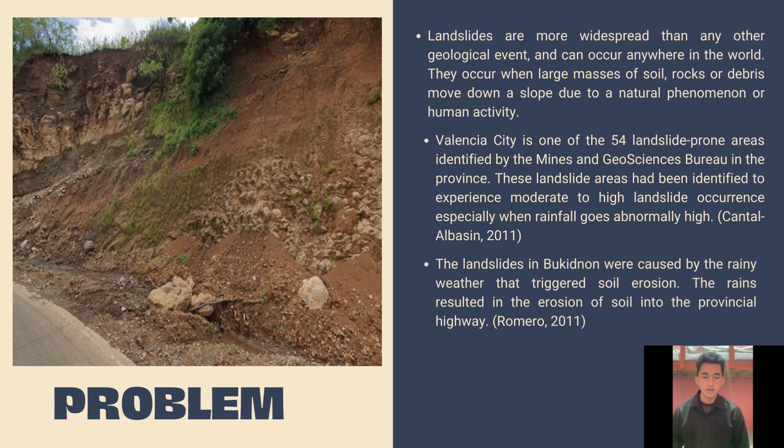The landslides in Bukidnon were caused by the rainy weather that triggered the soil erosion. The rains resulted in the erosion of soil into the provincial highway.

Introduction. Landslides pose a growing concern in the Philippines due to its mountainous terrain, seismic activity, and heavy rainfall. The country faces significant landslide risk with approximately 80% of its land area susceptible to landslides, ranking it fourth globally in terms of vulnerability. To address this issue, the integration of segmental retaining walls with geogrids has emerged as a promising approach, enhancing soil stability and strength while mitigating soil movement and structural failure.

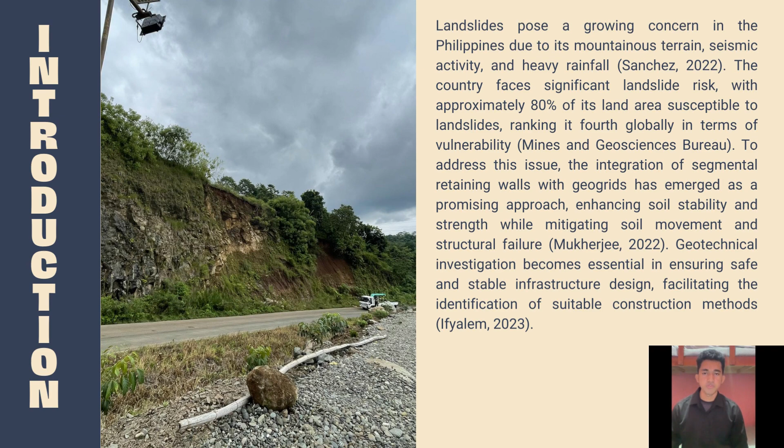Geotechnical investigation becomes essential in ensuring safe and stable infrastructure design, facilitating the identification of suitable construction methods. Integrating segmental retaining walls with geogrids and a road drainage system offers multiple benefits, including improved soil stabilization, efficient water management, and cost-effective solutions. This study aims to explore the geotechnical engineering approach for enhancing soil stabilization and water management in sustainable infrastructure along Poblacion Valencia City Diversion Road.

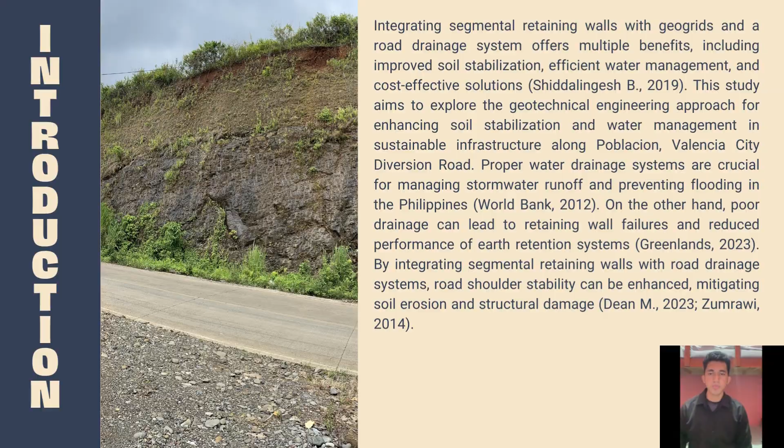Proper water drainage systems are crucial for managing stormwater runoff and preventing flooding in the Philippines. On the other hand, poor drainage can lead to retaining wall failures and reduced performance of earth retention systems. By integrating segmental retaining walls with road drainage systems, road shoulder stability can be enhanced, mitigating soil erosion and structural damage. So for our main title, we had Enhancing Soil Stabilization and Water Management, Integrating Segmental Retaining Walls with Geogrids and Road Drainage System at Poblacion Valencia City Diversion Road.

For the objectives, for the design of segmental retaining walls, we have to assess the stability of slope areas, optimize the design parameters of retaining walls for slope and unstable areas in connection with the application of geogrids. And also for the geotechnical investigation for integrating geogrids, we have to examine and determine geotechnical properties of soil. Also, we have to determine the effective locations and patterns for integrating and applying the geogrids, and also assess their effectiveness for our segmental retaining wall design.

And so for the design of road shoulder, for the integration of segmental retaining walls, we have to evaluate the significance of road shoulders for the safety of the road travelers in Valencia City Diversion Road near D'Bario Valencia. Also, we have to examine the required road shoulder width in the design of segmental retaining walls and drainage system for safety.

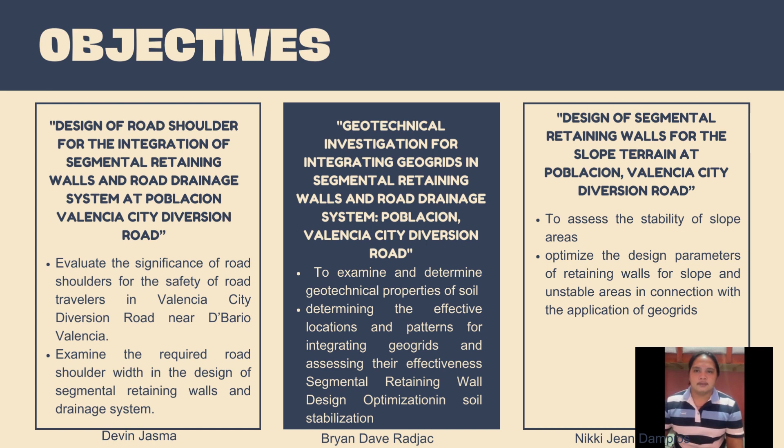And also for the design of drain pipe to be used at a retaining wall, we have to comprehend the influence of inadequate drainage on the integrity of retaining walls, potentially leading to failures or compromised serviceability over time. Offer appropriate solutions to enhance the drainage system and prevent potential risk associated with poor drainage in earth retaining structures. Also, we have to examine the drainage design's performance and recommend improvements to ensure optimal water management.

And so the development of water drainage system aims to improve drainage system efficiency and prevent flooding by analyzing existing systems, identifying weaknesses, and proposing enhancements. And also, we seek to enhance groundwater recharge by developing methods to capture and infiltrate rainwater into the subsurface through structures like infiltration basins and permeable pavements, promoting controlled replenishment of groundwater.

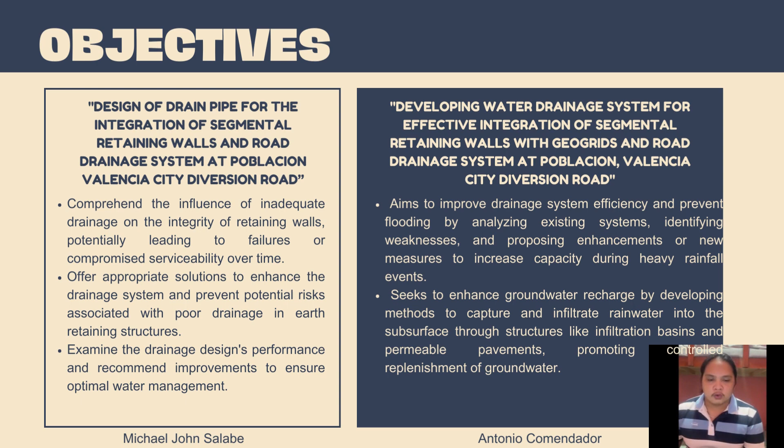So the significance of our study: it is significant to the community since it enhances the efficiency of transportation networks and public amenities, benefiting the overall functioning of the community. And also for the environment, these walls help prevent land degradation, maintain soil health, and provide stability for infrastructure development. And also for the future researchers, it is a valuable guide for future research in this field. And also for the engineers and designers, it gives easy access to innovative and cost-effective designs for road shoulder extensions and integrating retaining walls and efficient drainage.

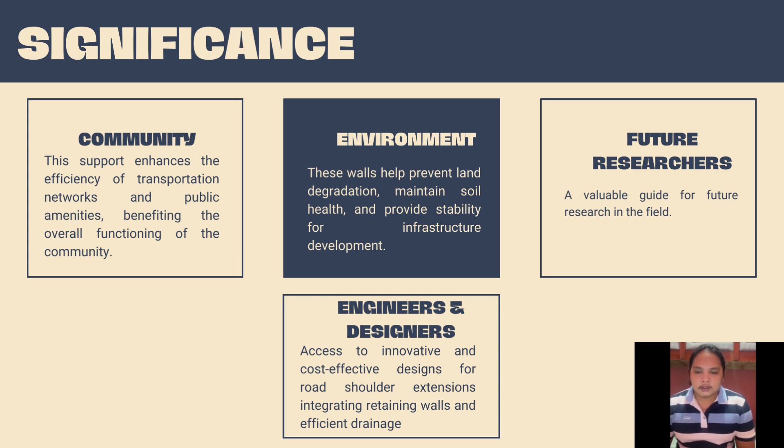So we have here the scope and limitations of our study. The study aims to analyze and assess the soil properties of Diversion Road in Poblacion, Valencia City, Bukidnon, with a specific focus on evaluating slope stability and earth retention measures to support the planned construction of a segmental retaining wall, or what we call SRW. The investigation involves examining factors like reinforcement placement, soil characteristics, and load conditions.

However, the findings and recommendations are limited to the specific site at Diversion Road. Moreover, the proposed measures for slope stability and earth retention will require additional evaluation and customization to suit the unique conditions and engineering considerations of each specific site.

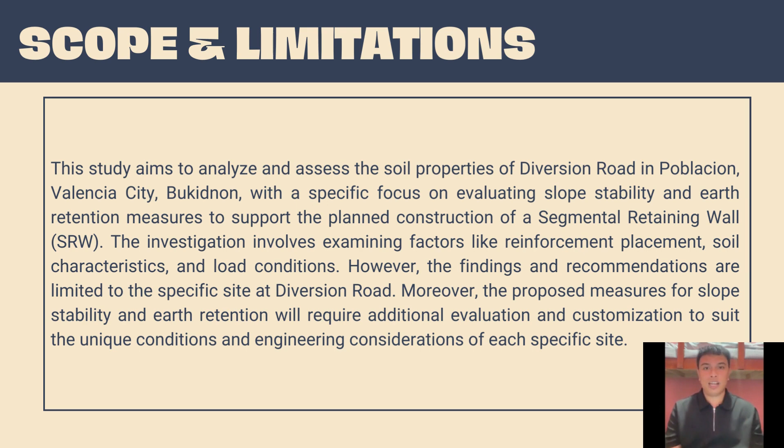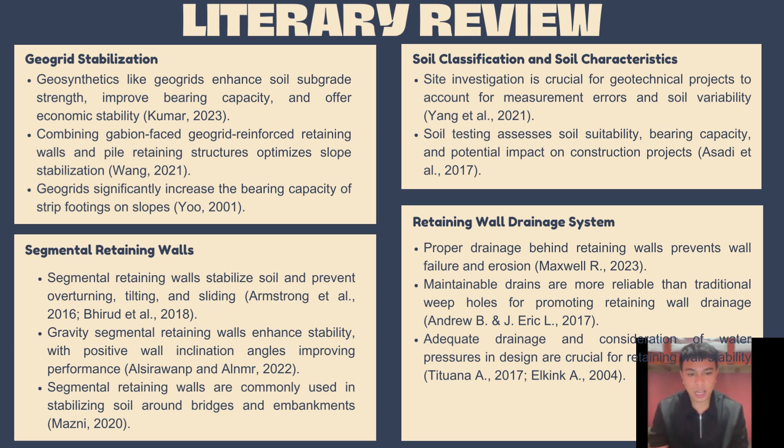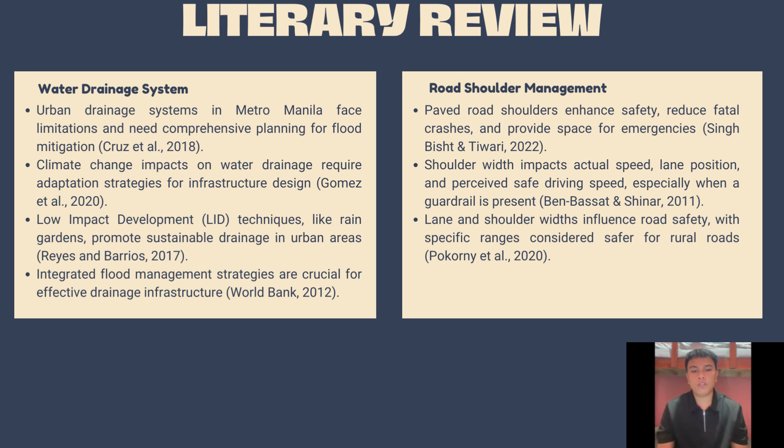And for the last literature review that could help support our capstone, we have road shoulder management, where paved road shoulders enhance safety, reduce fatal crashes, and provide space for emergencies. Shoulder width impacts actual speed, lane position, and perceived safe driving speed, especially when a guardrail is present. And lane and shoulder widths influence road safety, with specific ranges considered safer for rural roads.

Additionally, we will collaborate with the DPWH of Bukidnon 1st District Engineering Office to access relevant data. We will be collecting soil samples to analyze the soil properties and understand its behavior under different conditions. These samples will undergo laboratory testing to provide precise data for our study. Furthermore, we will conduct surveys to gather valuable insights from local communities of Poblacion and consider other literature studies.

Our data analysis will be multifaceted and focuses on generating meaningful results. For assessing structural stability, we will employ finite element analysis, GEO 5 software, and hydraulic analysis. These powerful tools will help us simulate various scenarios and evaluate the performance of the proposed infrastructure improvements. Descriptive and inferential statistics will play a crucial role in interpreting survey data and soil test results. These statistical methods will provide us with different insights into the challenges and opportunities present in the area of our study.

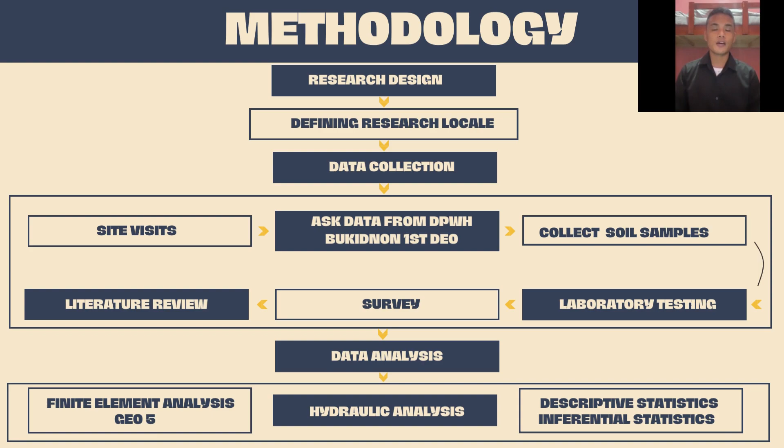So this is our capstone work plan. The first site visit, last week of June, is to identify the problem and assess the site requirements. The second site visit, second week of July, is to finalize the project site and gather additional data. The capstone proposal defense, last week of July, is to present and defend our well-structured proposal. The first week of August is data gathering, to gather essential data from the Department of Public Works and Highways. The soil testing, second week of August, is to assess soil properties to inform the project's technical aspect.

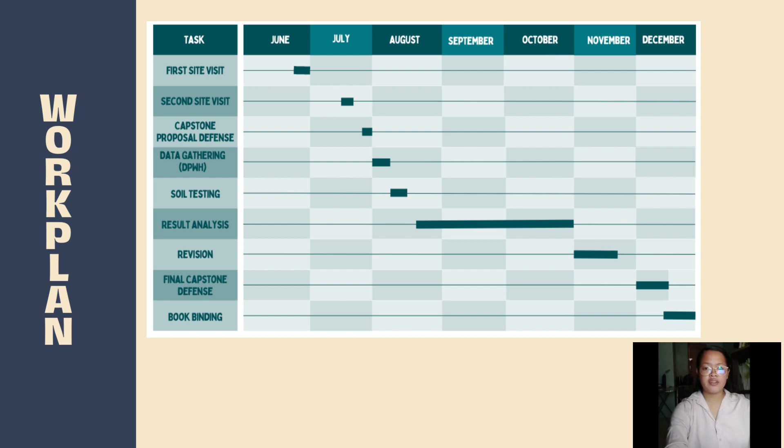The result and analysis, last week of August to October, is to thoroughly analyze collected data to derive meaningful insight. The revision, November first week to second week, is to address suggestions from the advisor and stakeholders. The final capstone defense is for the first or second week of December, to showcase our achievements and learning from the project. The book binding, third week to last week of December, is to assemble the final capstone report for submission.

So the budget of the capstone: in the first visit we used total expenses of 600. For the second visit, 450. The capstone proposal defense is 600. The data gathering, good for 3 days, is 2,700. The soil collection, 350. The soil testing, including the analysis fee, which is 1,500 each sample, is a total of 8,200.

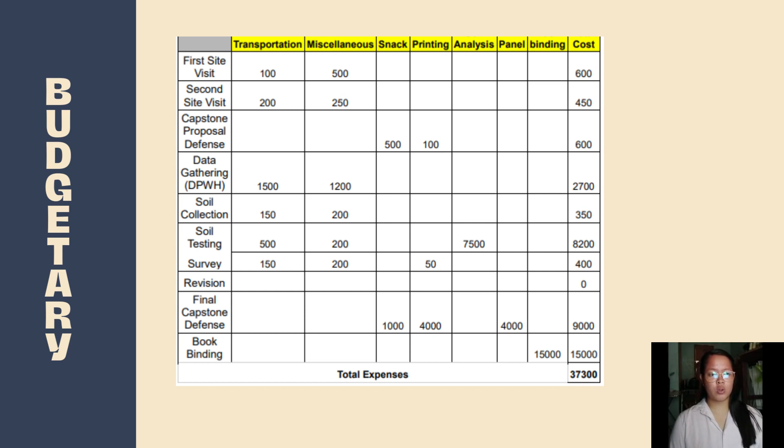The survey is 400. The final capstone defense, including the printing and panel, is 9,000. The book binding, for 30 pieces of books, is equal to 15,000. So the total expenses for the capstone is equal to 37,300.

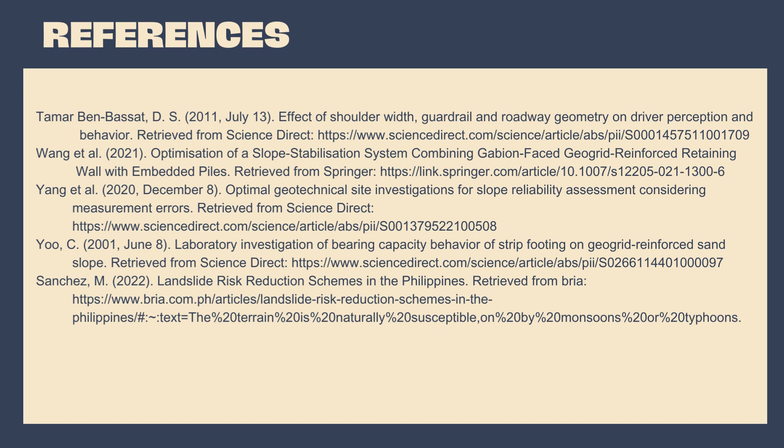So your presence and attention today is greatly appreciated. We are now open for any questions and discussion you may have.